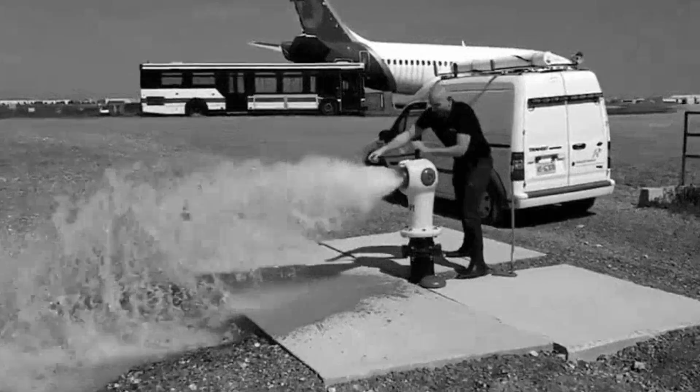And right now, that tank is silently controlling the water pressure in thousands of homes, hospitals, and fire hydrants across your entire city without a single pump running. That should not work. Something that looks like a relic from the 1960s should not be outperforming modern technology every single morning. But it does.

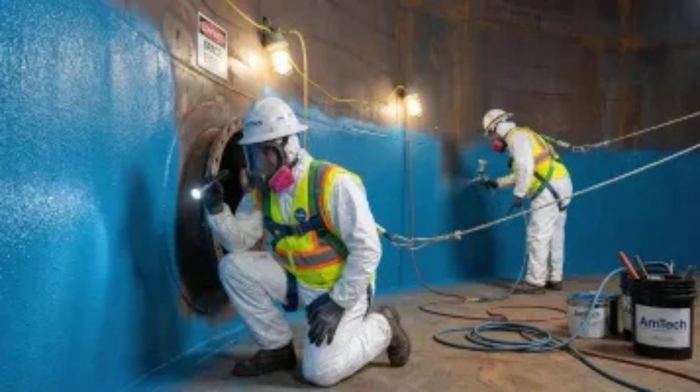And by the end of this, you will understand exactly how that primitive-looking tank on legs is quietly doing what millions of dollars in smart equipment still struggles to match, and why tearing it down would be one of the most catastrophic mistakes a city could ever make.

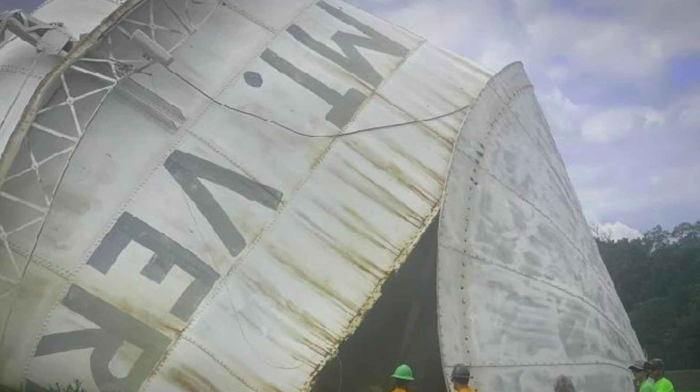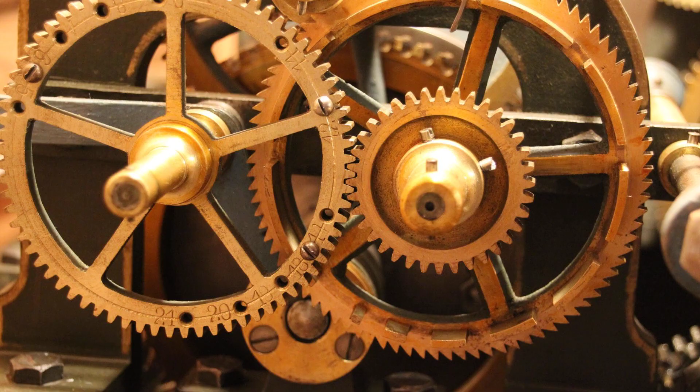To understand why that tower exists, you need to understand the real enemy of every city water system. It is not drought. It is not pipe corrosion. It is time. Specifically, the fact that people use water in completely unpredictable, violent bursts throughout the day.

Think about your morning. You wake up, turn on the shower, brush your teeth, maybe run the dishwasher before heading out. Your neighbor does the exact same thing at the exact same time. So does the family across the street. So does the apartment building on the corner. Now multiply that across an entire city. Millions of people doing the same thing at the same moment every single morning.

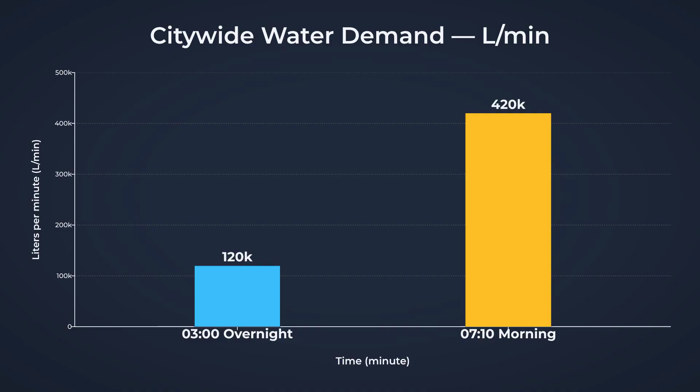In the space of about 2 hours, a city's water demand does not just rise, it spikes violently. We are talking about demand jumping to 3 or 4 times the overnight baseline in a matter of minutes. Every toilet flushed, every faucet turned, every industrial kitchen firing up at once.

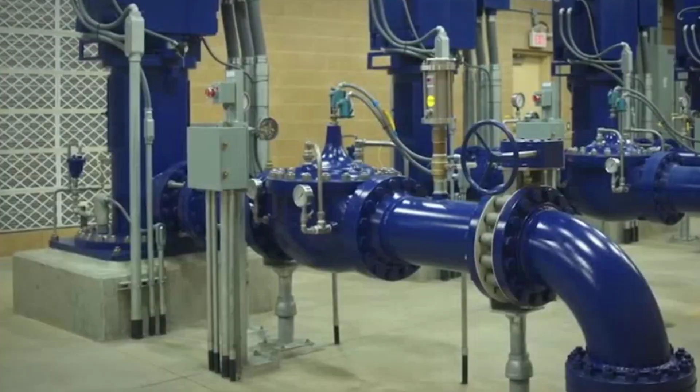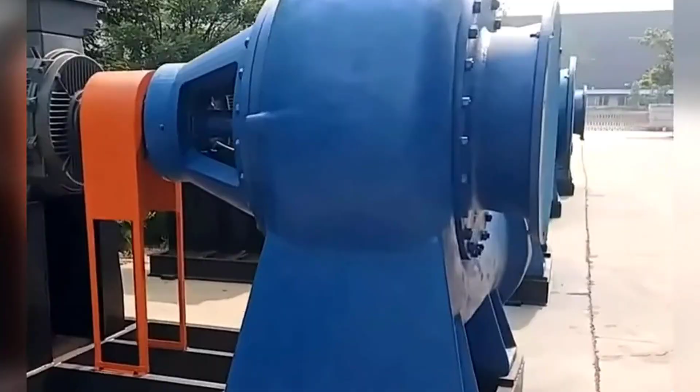Now here is the problem. The pumps that feed your city's water system are not built for this. They are sized for average demand, not peak demand, and there is a very good reason for that. If you sized a pump to handle peak morning demand, you would be running a massively oversized, energy-hungry machine at 10% capacity for most of the day. That is economically insane. No city can justify that cost.

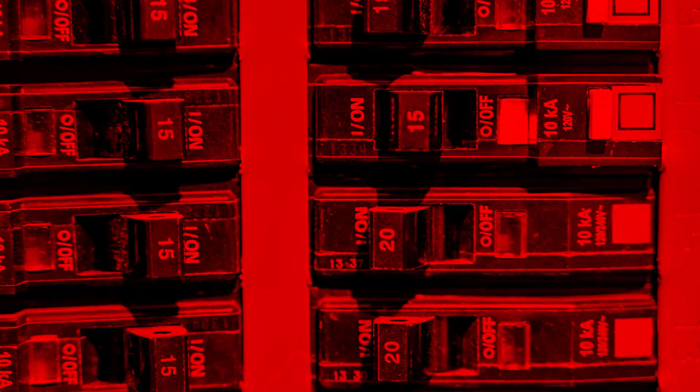Think of it this way. Trying to run a city's water supply purely on pumps is like trying to power a football stadium through a single extension cord. The moment demand spikes past what that cord can carry, the whole system fails. Pressure drops. The cord burns out. Pumps have the exact same limitation.

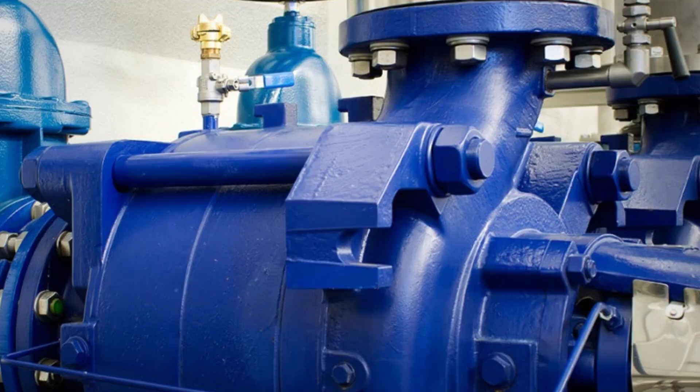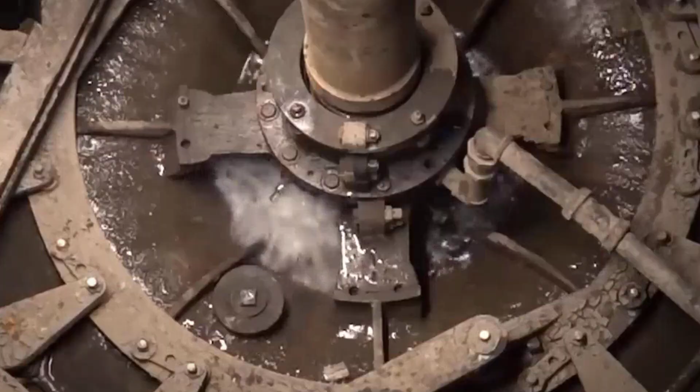They can only push so much water so fast, and when an entire city wakes up at once, they simply cannot keep up. And even if you could somehow justify the expense of an enormous pump, there is another problem. A pump that large takes time to spin up to full power. It cannot go from idle to maximum output instantly, but water demand does not wait. It hits all at once, without warning, every single morning.

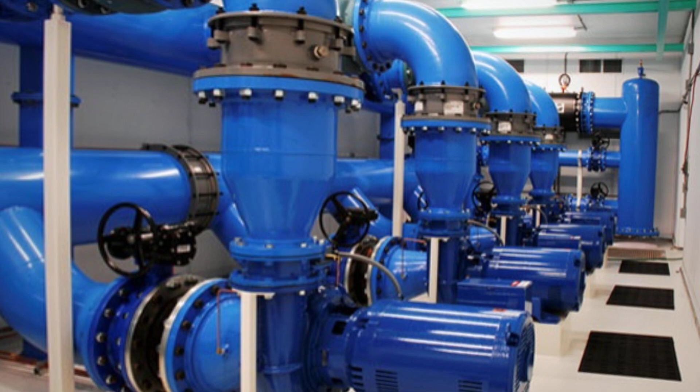So engineers looked at this problem and did something clever. They did not try to build a bigger pump. They did not try to make the system faster. Instead, they found a way to store energy. Here is what actually happens.

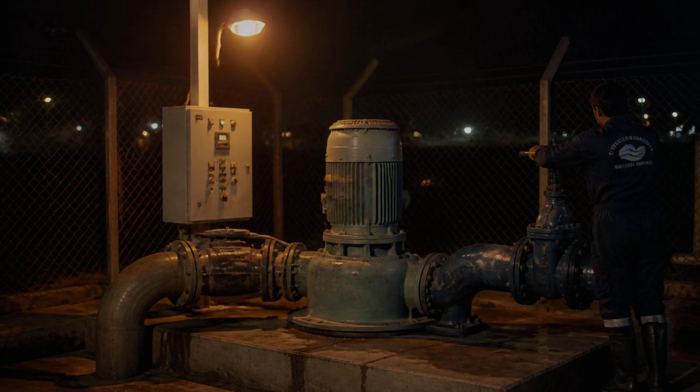Overnight, when almost nobody is using water, a relatively small and efficient pump switches on. It does not need to be powerful. It does not need to be fast. It just needs to be steady. For hours, while the city sleeps, that pump pushes water upward into the tower, filling it slowly to capacity.

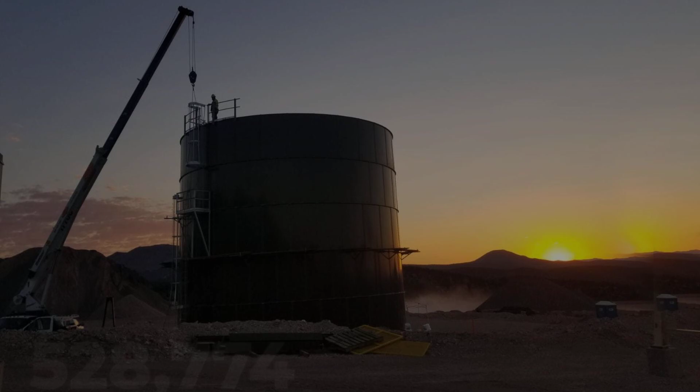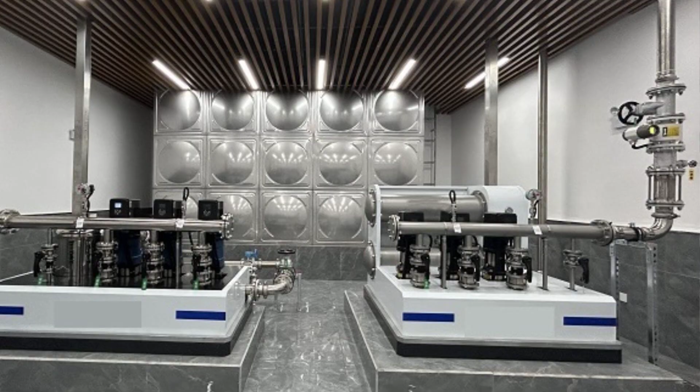A typical water tower holds anywhere from 500,000 to 1 million gallons. That is an enormous amount of water sitting quietly in the dark, waiting. But the water itself is not the point. Something invisible is happening as it climbs. Every gallon the pump pushes upward is a conversion. The pump is taking electrical energy and turning it into gravitational potential energy.

It is, in effect, winding a spring, loading a catapult, charging a battery made entirely out of water and height. The higher the water goes, the more energy is stored. And all of that energy sits there, perfectly preserved, costing nothing, losing nothing, until the moment it is needed.

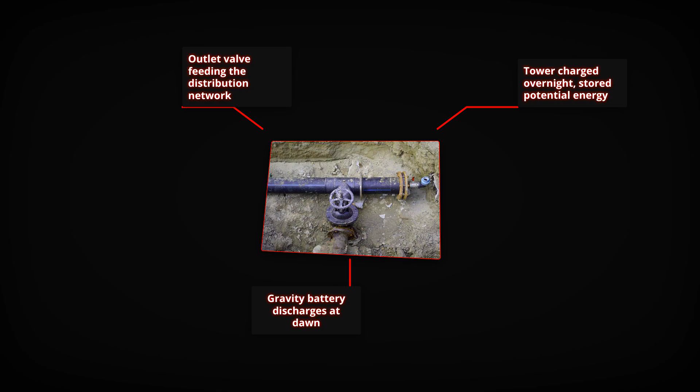Then morning hits. 6 o'clock. Demand spikes across the city like a switch being flipped, and the tower responds instantly. Water begins flowing out of the tank and into the distribution network below, feeding pressure to every pipe, every faucet, every hydrant connected to the system. No emergency pump fires up. No backup system kicks in. The tower simply releases the energy that was stored hours earlier, and gravity does the rest.

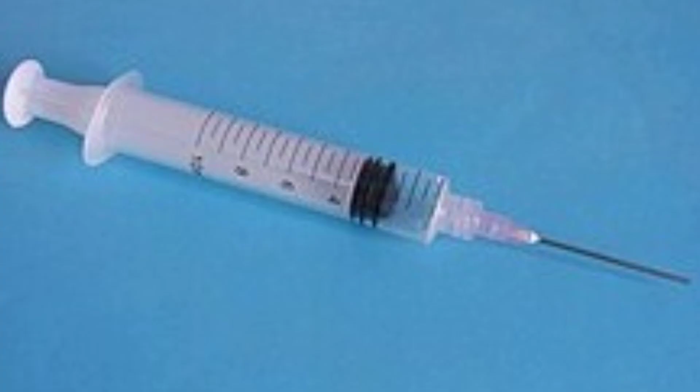Think of it like a fully loaded syringe held above your head. Nobody is pushing the plunger. There is no motor involved. Gravity is doing the pushing. The higher you hold that syringe, the harder the water comes out. That is the entire principle behind a water tower. Elevation is pressure, and everything else in the system flows from that one idea.

Here is what makes this so remarkable. The pump that filled the tower ran overnight, when electricity rates were at their absolute lowest. It ran during the hours when demand on the grid was minimal, and now, during the most expensive, most demanding hours of the day, the city is getting its water pressure for free. The energy was already spent. The bill was already paid. The tower is simply returning what was given to it, silently and without complaint.

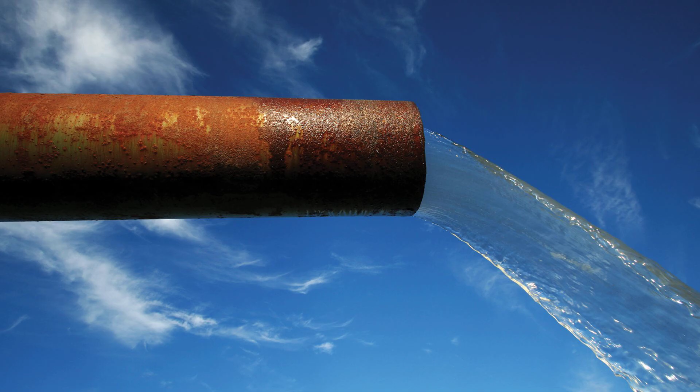The plunger was loaded last night. This morning, gravity is doing all the work. And gravity never overheats. It never breaks down. It never needs a technician. And it never sends your city an electricity bill. The pump did its job in the quiet hours. Now the tower is doing its job in the loud ones.

Here is where most people's understanding breaks down completely. When you turn on your tap, you probably imagine a pump somewhere deep in the system roaring to life and pushing water directly toward your house. That is not what is happening. In a system with a water tower, the pressure at your tap was set before you even woke up. It was set the moment the tower was filled. The pump did its job hours ago. What you are feeling when that water hits your hand is not mechanical force.

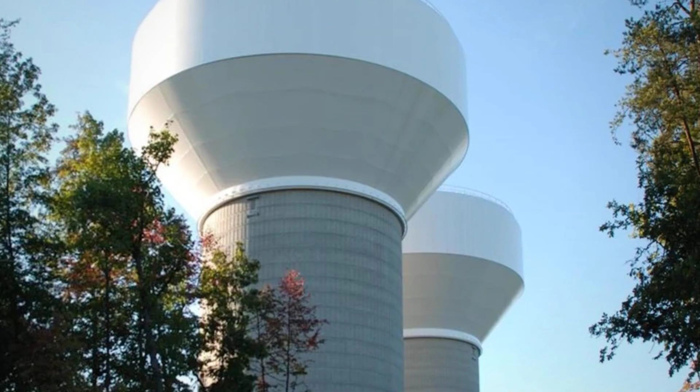It is weight. Pressure in a water tower system is not created by pumps at the moment of use. It is created by the sheer weight of water sitting above you. This is called hydrostatic pressure, and it is one of the oldest and most reliable forces in engineering. The physics are beautifully simple. Every single foot of water elevation generates approximately 0.43 pounds per square inch of pressure at the base. That means a water tower with water sitting 150 feet above your tap is delivering around 65 pounds per square inch of pressure, consistently, silently, without any variation at all.

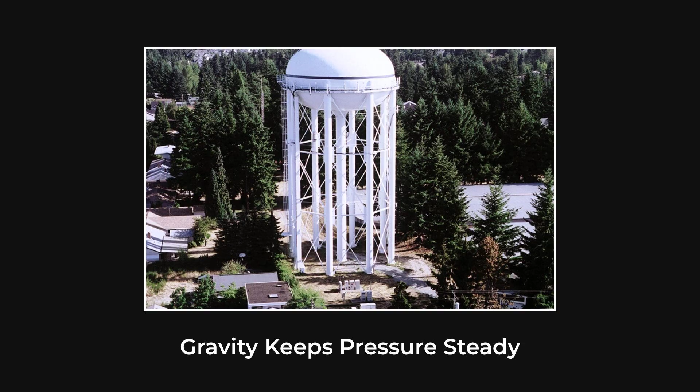If you want to feel what this force actually is, think about the last time you dove to the bottom of a swimming pool. Remember that uncomfortable squeezing sensation in your ears as you went deeper. That pressure pushing against you from every direction. That is the weight of the water above you pressing down. The deeper you go, the harder it pushes. A water tower works on the exact same principle. The higher the water sits above your tap, the harder it flows when you open it.

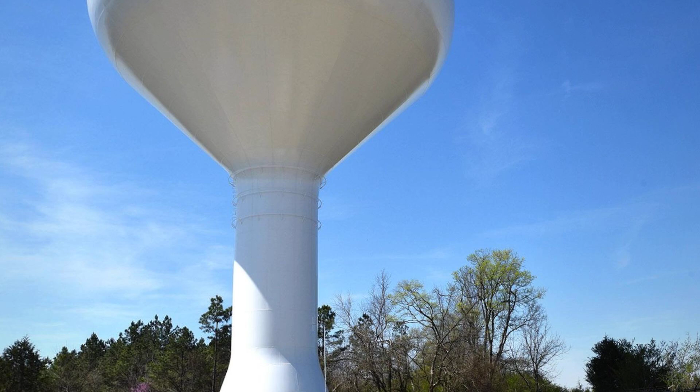And here is the critical part that makes the entire system work. That pressure is constant. It does not fluctuate based on how many of your neighbors are showering at the same time. It does not drop when a pump stutters somewhere across the city. It does not surge unpredictably when demand suddenly falls. As long as there is water in that tank above you, the pressure in your pipes remains stable within a remarkably narrow range. It just sits there, steady, doing exactly what it is supposed to do. For most people at home, that consistency is a convenience. You expect the shower to feel the same every morning, and it does.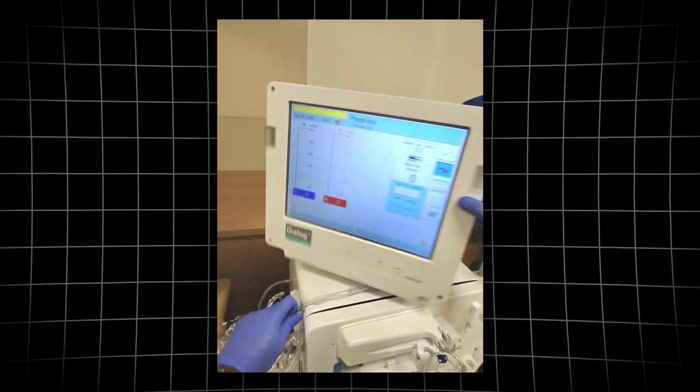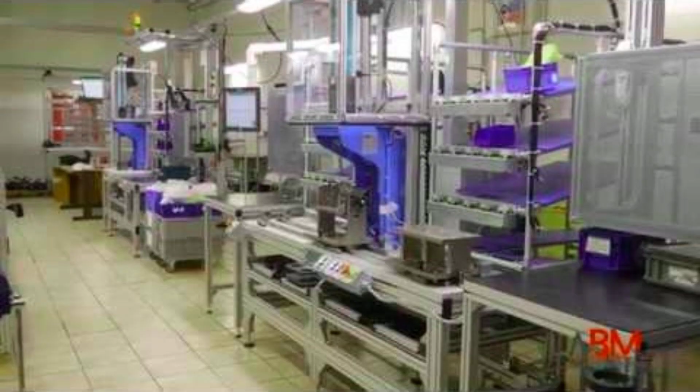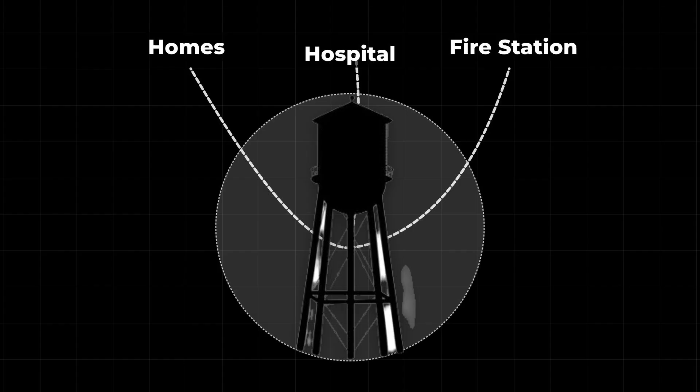But for hospitals running dialysis machines that depend on precise water pressure, for fire suppression systems that need instant full pressure flow the second they activate, for industrial facilities operating sensitive hydraulic equipment, that consistency is not a convenience. It is a non-negotiable requirement. Lives depend on it. And a passive tank filled with water and gravity delivers it more reliably than any pump ever built. So if the system is this simple and this effective, a fair question follows. Why haven't we replaced it? We have sensors now. We have smart grid technology.

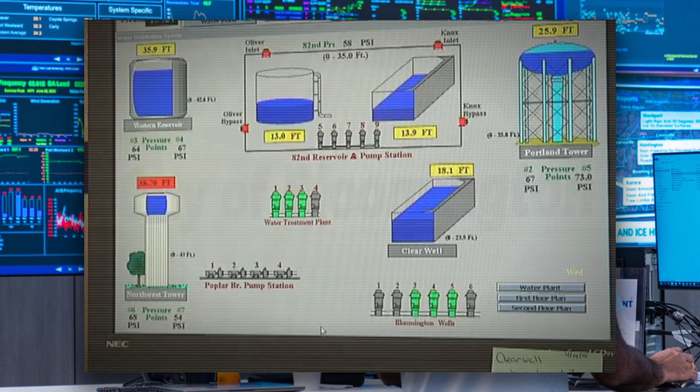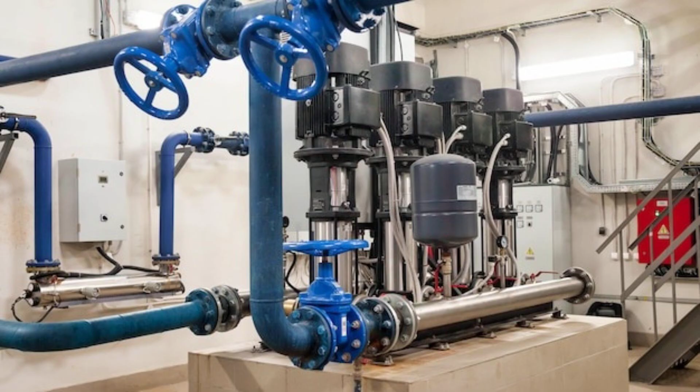We have pumps that can modulate pressure in milliseconds and variable speed drives that adjust output on the fly. Surely all of that makes a passive steel tank on legs obsolete. It is a reasonable assumption, and it is wrong. Here is what modern alternatives cannot do. They cannot do all three of the things a water tower does at the same time, at the same cost, with the same simplicity. And those three things are what make a water tower irreplaceable.

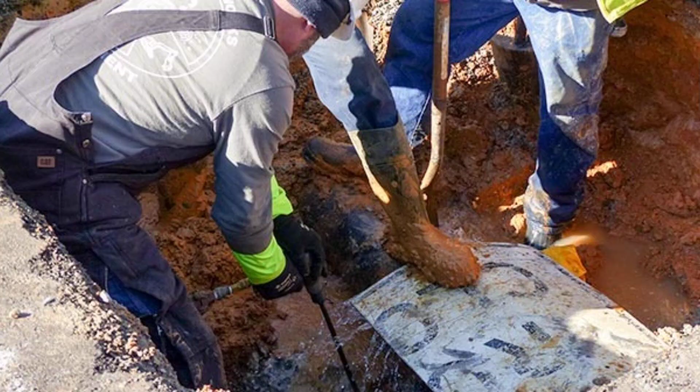The first is emergency volume. A water tower holding 750,000 gallons is not just a pressure tool. It is an emergency reservoir. When a main pipe bursts somewhere in the network, when a pumping station loses power unexpectedly, when a wildfire erupts and every hydrant in an entire neighborhood needs to deliver massive flow simultaneously, that tower is the buffer standing between your city and catastrophe. It does not need to be activated.

It does not need someone to flip a switch. It is already full, already pressurized, already delivering. It can sustain a community for hours while the crisis is being resolved. No modern pump station can sit passively ready like that without consuming energy every second it waits.

The second is pressure during power outages. Pump stations run on electricity. That is an unavoidable fact. When the grid goes down, they stop. Backup generators can help, but they take time to start, they require fuel, and they introduce complexity into a moment that demands simplicity. Gravity does not care about the electrical grid.

A full water tower continues delivering pressure for hours into a blackout. Hospitals keep running. Fire suppression systems stay live. Water keeps flowing to the people who need it most. There is no switchover delay, no startup sequence, no fuel dependency. The water simply falls, the same way it always does.

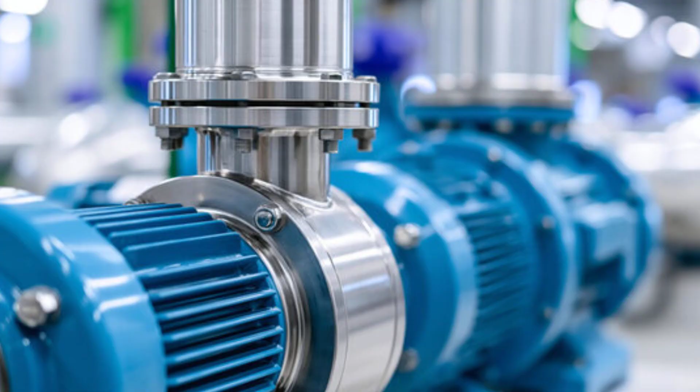The third is cost. Every additional gallon a pump delivers during peak hours costs money. The electricity to run it, the wear on the equipment, the maintenance to keep it operating under heavy load. Every gallon flowing from a water tower during peak hours costs nothing extra. The energy was already spent overnight, when electricity rates were at their lowest.

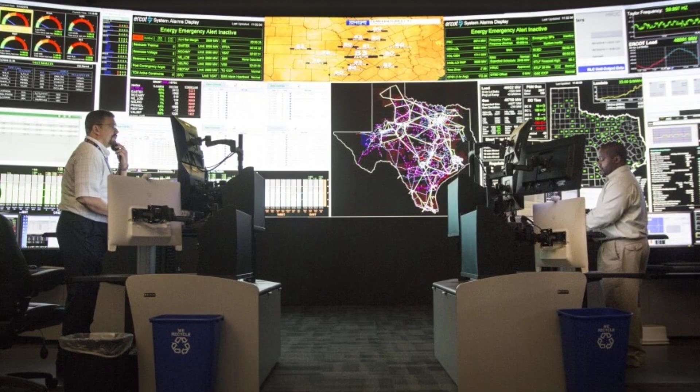You charge the system when power is cheap. You discharge it when demand is high. And the infrastructure that makes this possible costs almost nothing to operate once it is built. The economics are almost unfair.

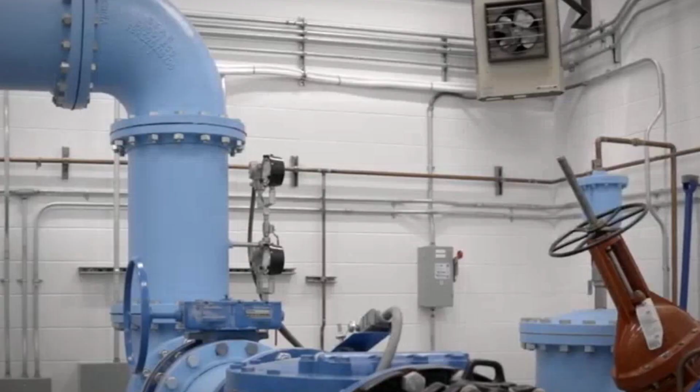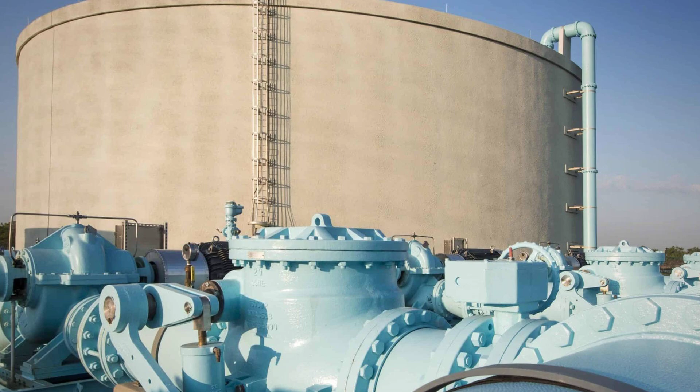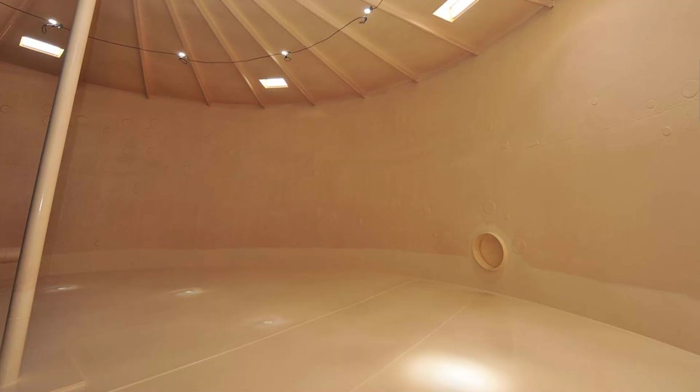Modern alternatives have their place. High-pressure pump stations serve dense urban cores where building a tower is impractical. Variable speed drives improve efficiency in systems that already exist. Pressurized ground-level tanks work in specific situations, but none of those solutions are gravity. None of them operate with zero energy input during the exact hours when energy matters most, and none of them combine emergency storage, outage resilience, and peak demand economics into a single structure that has no moving parts.

There is a reason cities with populations in the hundreds of thousands still rely on water towers that are 50 or 60 years old and still in daily service. It is not because those cities cannot afford something newer. It is because nothing newer does everything that tower does. So the next time you drive past that rusting tank on stilts at the edge of your city, you will know what it actually is.

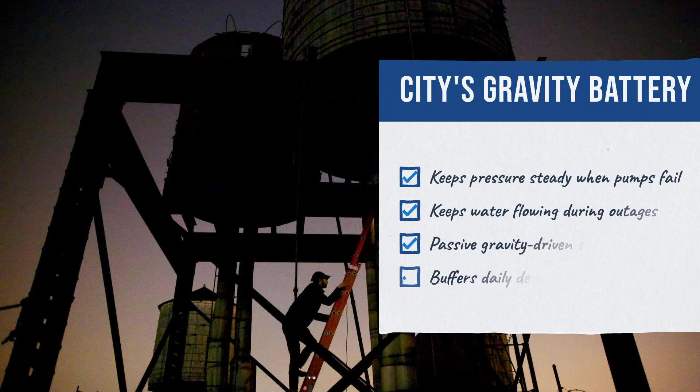It is not aging infrastructure waiting to be torn down. It is not a relic of outdated engineering. It is a passive gravity battery that your city depends on more than almost any other single structure. It stores energy when no one needs it and releases it the moment everyone does. It keeps pressure steady when pumps fail, keeps water flowing when the power grid goes dark, and does all of it without a single moving part.

The most reliable system in your city has no software, no electronics, and no maintenance schedule that comes anywhere close to what modern alternatives demand. It runs on a force that has existed since the beginning of the universe. And that is the part worth remembering.

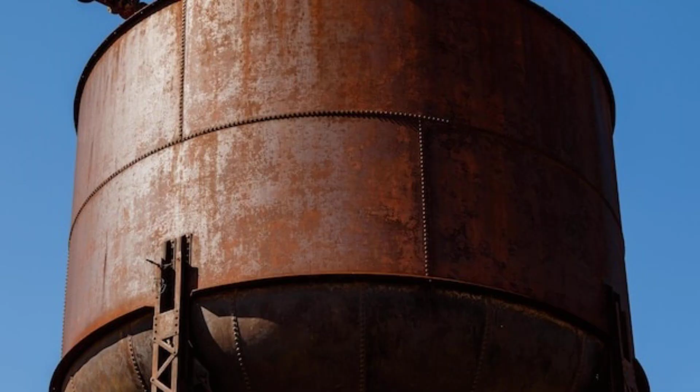Sometimes the most sophisticated solution to an engineering problem does not look sophisticated at all. Sometimes it looks like a steel tank on legs that has been sitting quietly at the edge of town for 60 years, doing exactly what it was built to do. Nothing. And that is exactly the point.